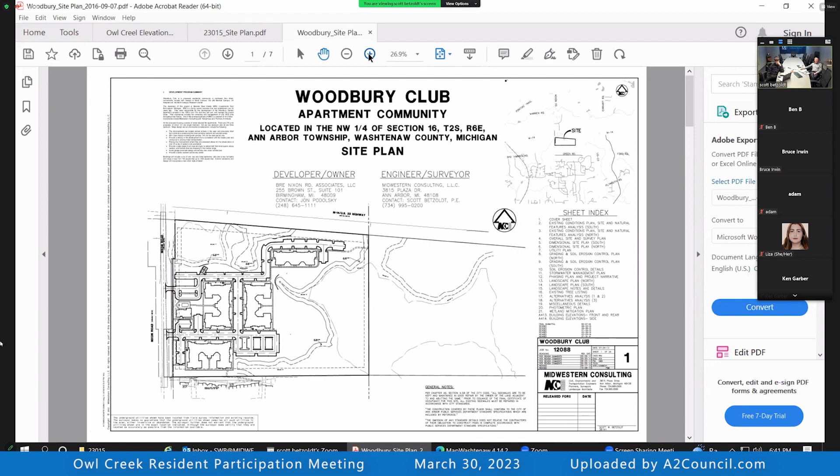And I would take an opportunity to even show you that. So this is the original submittal to the city of Ann Arbor, probably back in maybe 2014. As you see, there's a building sitting up here. I don't remember if we actually went through and completely got the whole site plan approved before we went back and amended it and removed this building, or if we decided to remove the building during the part of the approval process.

But nonetheless, it was contemplated. Many utilities have been set up in forethought of this building being constructed sometime in the future, so it's a relatively easy plug-in to the existing site.

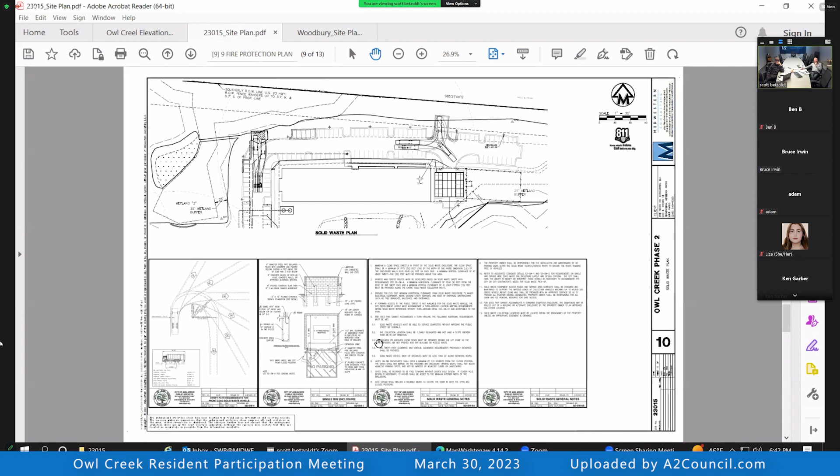The particulars of the actual footprint of the buildings changed over the course of the project. The footprint of the building we're proposing for this area, a building pad on the site as yet unused, is just a fairly simple rectangular building pad, kept as simple as possible to build. Construction costs in today's environment are sky high, so we're keeping it simple to keep both energy costs of running the building and construction costs low.

The building would have a footprint that is smaller on the first level. The upper levels would extend over that lobe of parking on the east side of the main body of the building. So that's the first floor plan—you can see the dash line extends out over that parking. This lets us increase the number of units without markedly increasing the impervious area, because at that part of the site the pavement is already impervious.

We would add a new trash dumpster location in the upper left-hand corner of the site to handle the compacted trash and recycling containers that building would produce. The existing trash handling facility is probably not going to be able to handle 100% of the trash in the new building, so we're proposing a separate trash pickup location.

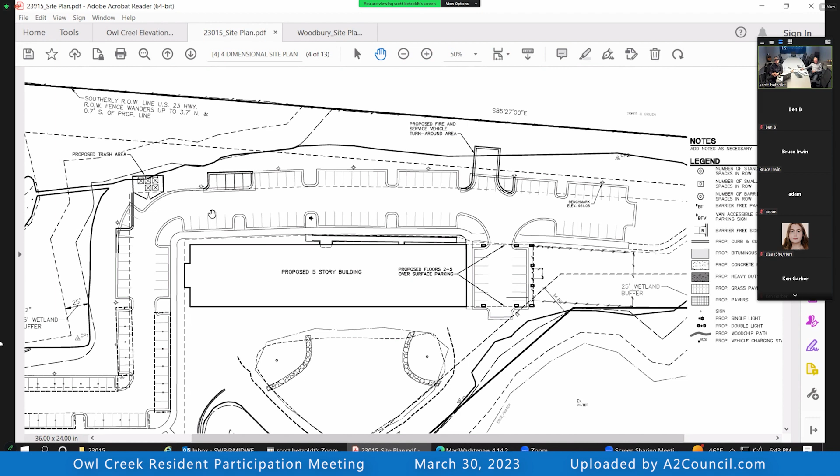The existing detention pond currently located out here will partially serve this new building. In addition, we'll be augmenting with some underground detention cells. The water and sanitary systems are perfectly capable of handling this additional building—that was vetted when we originally proposed this, what now has become a deferred project.

We've had preliminary meetings with the city to discuss refuse collection, water and sewer issues, and the parks issue. What else are we likely to tackle with them? Basically planning and zoning issues—planning, zoning, parks, solid waste, fire marshal, engineering, utilities.

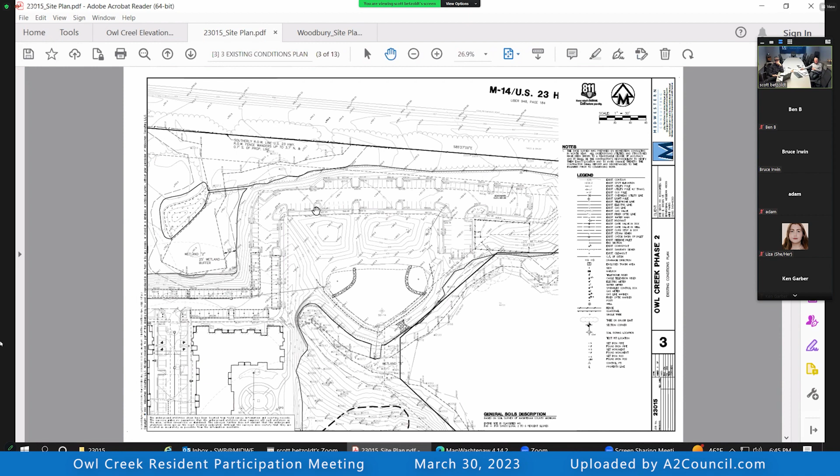Yeah, this is a rezoning since the original project was approved. Our clients donated 9 acres of property to the city of Ann Arbor—all of this over here—donated to the city at the city's request. So when this building was originally proposed, they would have met density requirements for the zoning district they were in. But because they gave away this property, they're now proposing the same building that would be at a higher density than the zoning district of the balance of the site allows.

If they hadn't given this property to the city, they would have been able to just construct this building, and it would have just been a city planning commission issue to approve—it would never have had to go to city council. But as a result of their donation of parkland, we'll now have to go to city council for technically a rezoning. But it's the same project that was originally proposed to the city of Ann Arbor back in about 2014.

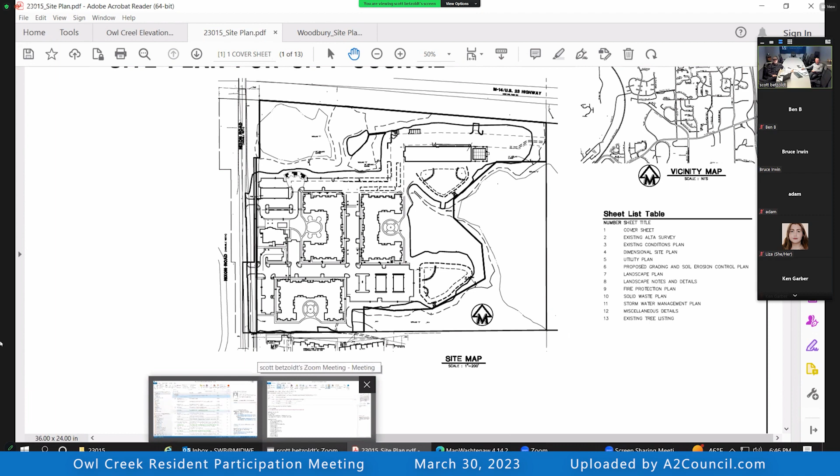You want to run through the architectural elevation? Yeah. Okay, here's the pretty stuff.

So the building would be 5 stories predominantly in the center of the structure, and then 4 stories at each end. The 4-story portions would have an outdoor amenity terrace for the residents. On the 5th floor element, the middle element, we would reserve that rooftop area for rooftop mechanical equipment and solar panels, so usage of the building's rooftop is only at each end of the building.

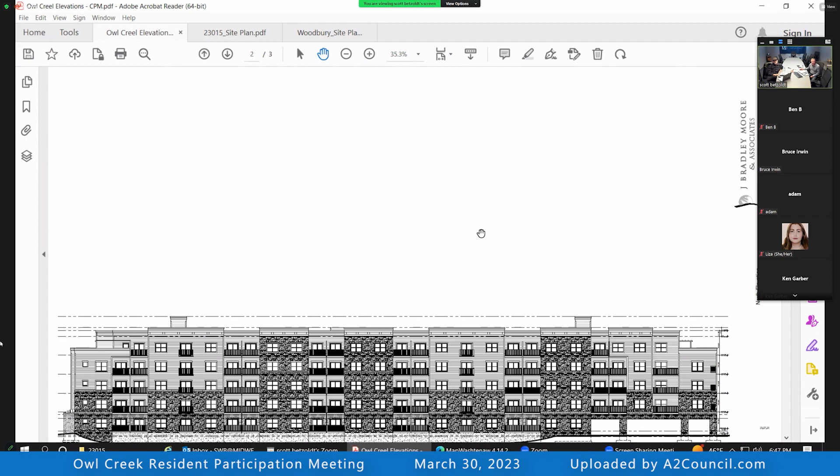You'll see on the left-hand side there's the part where the building goes over the parking. And then the exterior palette of materials is viewed as being the same as the existing buildings, which are a combination of stone and siding, and exterior balconies for most of the units, though not all, so that they have the ability to step outside in the fresh air. That's true with the existing buildings as well.

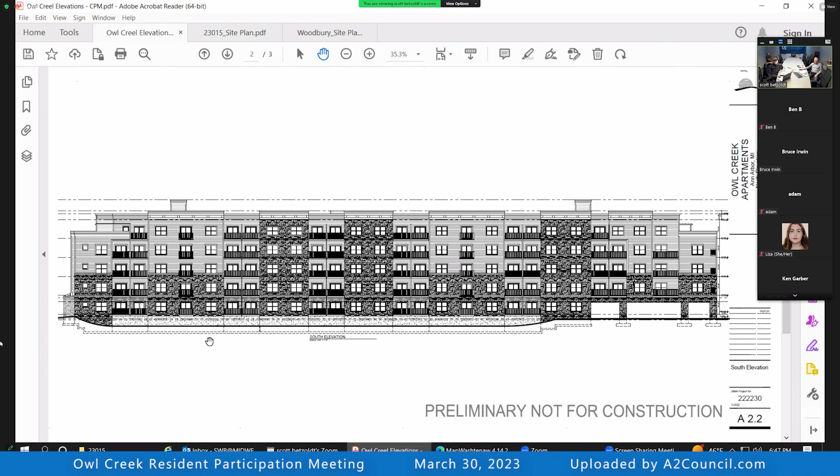This is the north elevation—this is the highway side. That's the opposite side, the south side, facing the wetland area. This isn't really a big show—these are the ends, the west end and the east end.

The first floor of the west end is a trash handling room where the trash chutes and compactors are—that's why there's an overhead door there. The 2 and 3 yard compacted trash bins get rolled out of that room over to the collection point we talked about earlier on the site.

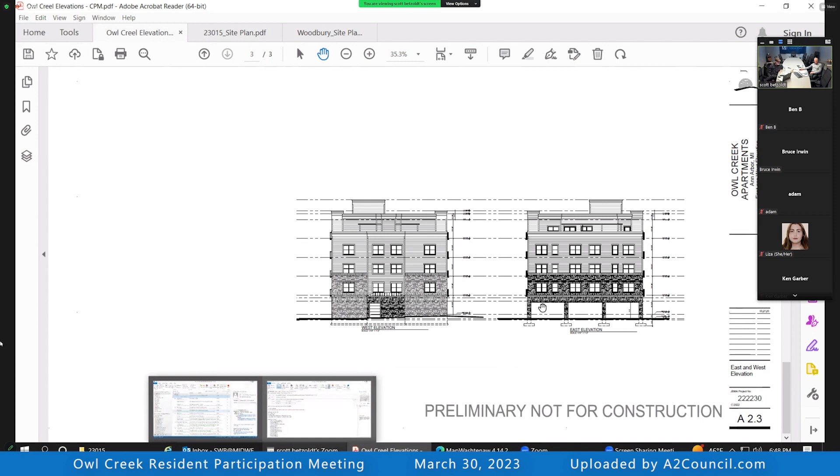So with that, we'll open it up for questions.

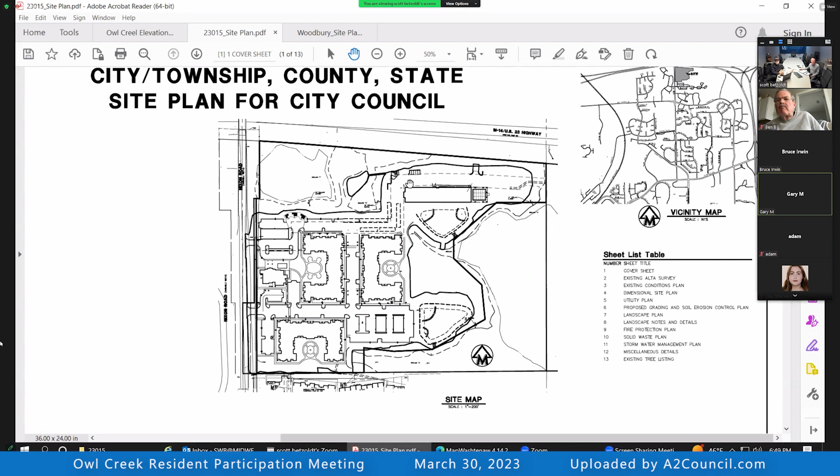So it's like the last little leg of those carports, that corner where the carport's present. So Gary, hold on a second. So right there, that corner right there, that's the one that you already see damage there. I'm not certain you're going to be able to maintain some of those carports if you're planning on getting 40-foot moving trucks in and out of there.

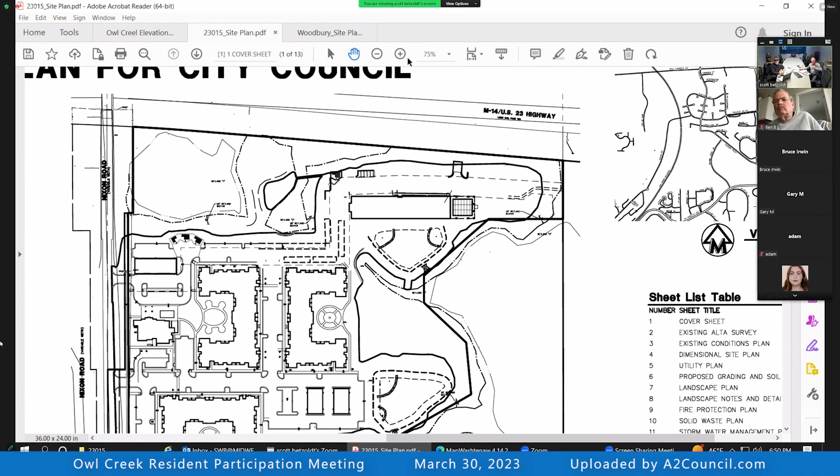Okay, well, that's very interesting. I'm glad you brought that up, let me just pull something up here. And if that's the case, we may have to relocate some of those carports. Well, we have to actually. We absolutely have to. I just need to get to...

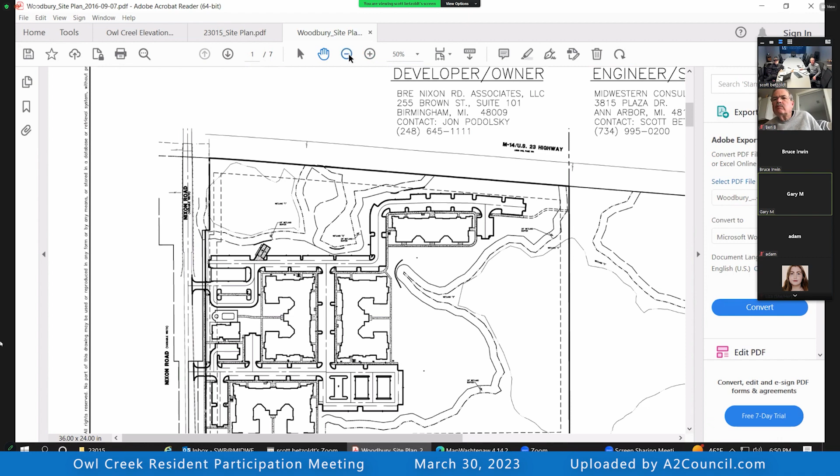And can you sort of walk us through how you envision the residents of this new structure traversing through that community, and whether they're coming out the north entrance or the south entrance onto Nixon Road? How do you envision that happening?

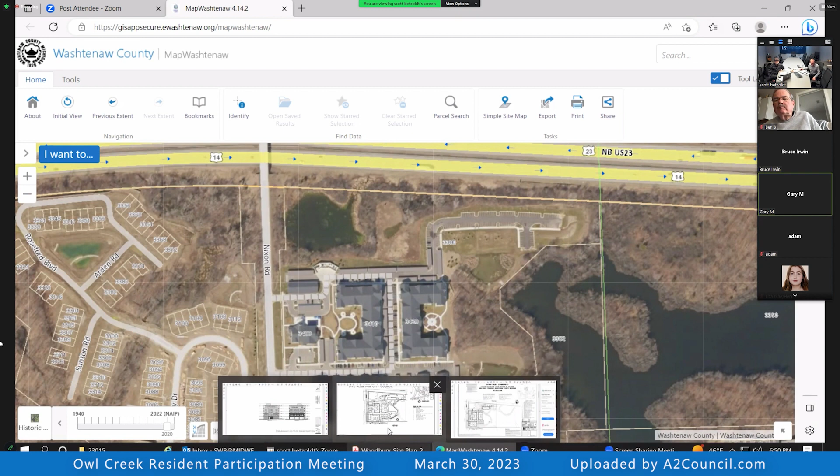I'm waiting for Scott to... Yeah, I'm obviously struggling here. Okay, all right, I got it. It's almost easier to see from the satellite view. Okay, all right, thank you. You can see the road.

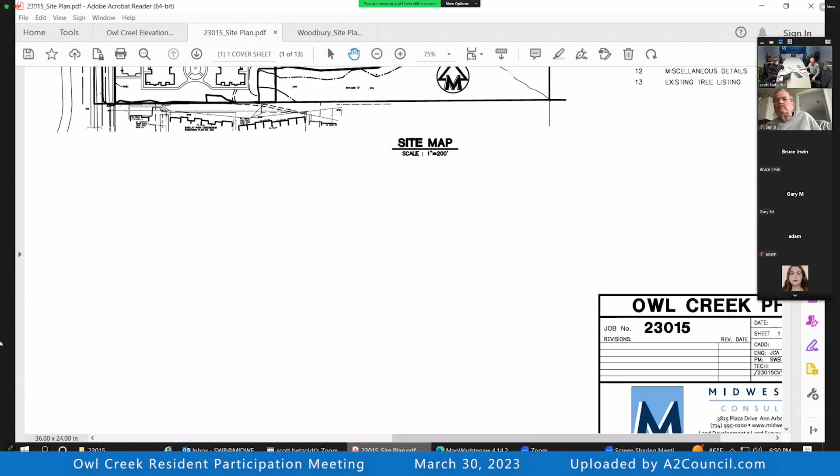Okay, so we have to remove... so I'm guessing the inside, yep, things are damaged. Okay, inside corner. Oh, thank you very much, because we have to remove either some outside carports or some inside carports. Relocate, because we have to remove them from this area since we have a water main easement that's going to be too large. They can't be in the water main easement.

So knowing this is a tight corner, am I actually looking at damage to that corner right there? Yeah, take a drive over there, you'll see that there's damage to those carport edges. Okay, that's good to know, because that tells me which ones should be relocated. And I didn't know that, but that's a very good point. I thank you for that.

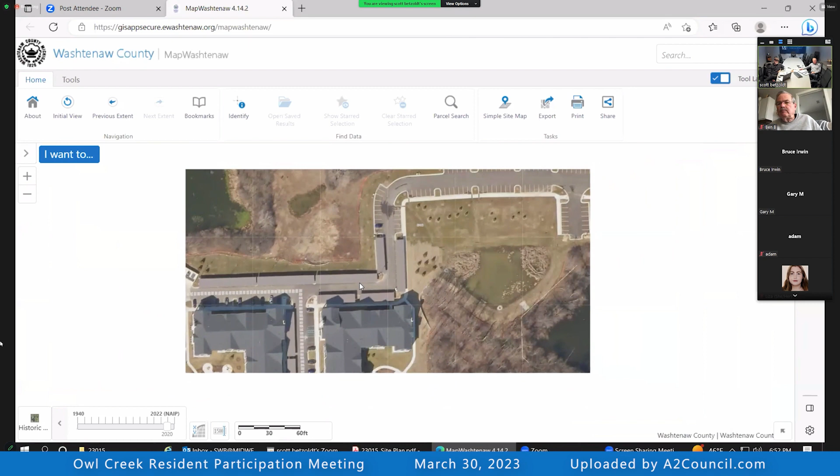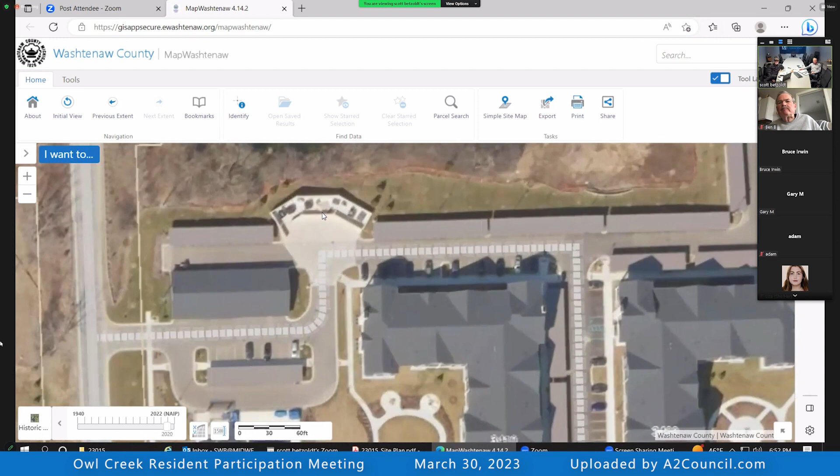Yeah, my guess is, Scott, if you can pan to the left, my guess is that the majority of the traffic would probably exit from that northern driveway, since that's the closest one to that parking lot. We have a traffic engineer retained for the project. He's not here tonight, but I could certainly verify that with him and get back to you.

No, I can see what Gary's talking about. That looks like a pinch point there. Yep, for a long, large vehicle.

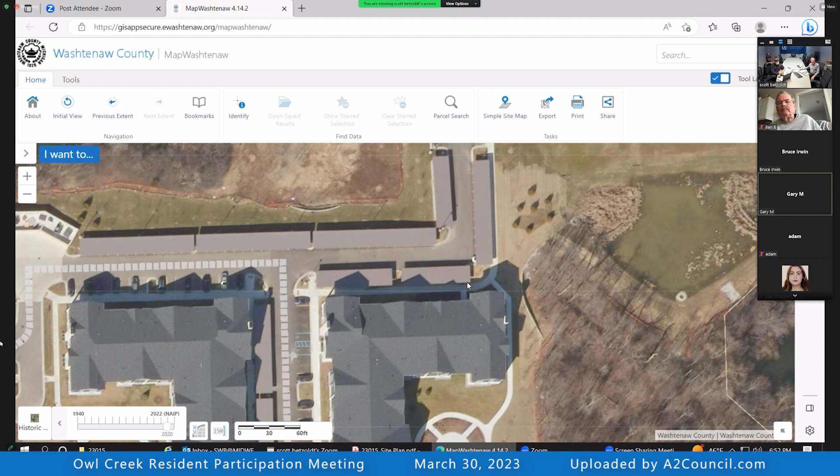So the reason I ask about the ingress and egress off on Nixon Road is that when you come out of that north entrance onto Nixon Road, the cars are coming over that hill, over the bridge, and they're cruising, and it's sort of dangerous to try and make a left turn and go south there out of the north entrance onto southbound Nixon.

Which brings me to the possibility of trying to see if you can get some traffic flow mechanism for southbound Nixon Road's speed. Northbound, yeah, probably fine, but southbound there's people probably going 60 miles an hour. I would believe you. We'll check with the city engineering and traffic department to see if there might be some kind of measure we could implement to ameliorate that.

Yeah, it might be a cause for one of those radar signs, the flashing ones. There you go, yeah, right. That's a start. People usually notice those, don't they?

Yeah, but I'm just saying right now, pulling out of the north side and trying to go south, especially in the morning, can be very dangerous. And adding more people going out of there is only going to make that situation worse. I noticed they've added some of those radar speed signs around Pioneer High School. I go past them every day, and people do seem to take notice and slow down when their speed is obviously being broadcast.

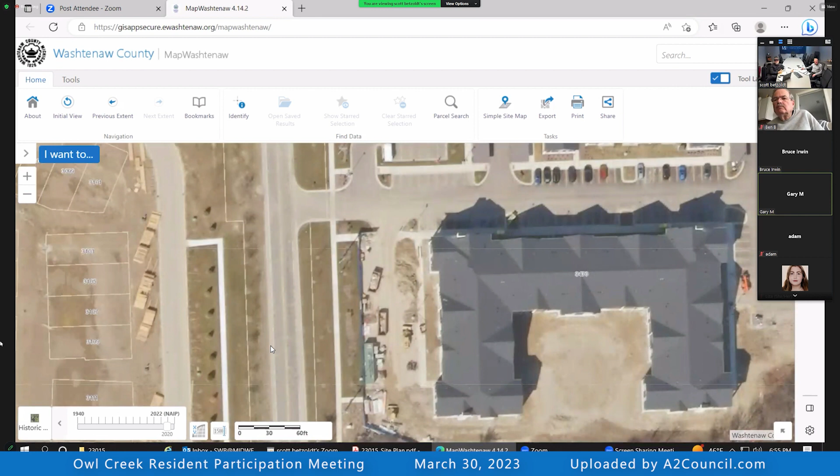So is it mostly potholes, or is the edge of the pavement deteriorating along the shoulder, or cracks forming from differential settlement? Is there any specific kind of issue? I think all of those are probably true at various points along the road.

Thanks, Gary. Having a nice new shiny residence is nice, but having your people driving over Nixon Road to get there is not going to be doing you any favors. Not that it won't be a nice place to live, because I really enjoyed my stay there.

You still live in the area, Gary? Yeah, I actually live across the street right now. Okay, the Toll Brothers development? Yep. Okay, thank you. Thanks, Gary. I'm in building 3. And right now? Right now.

I agree with what Gary has said. The road is breaking up.

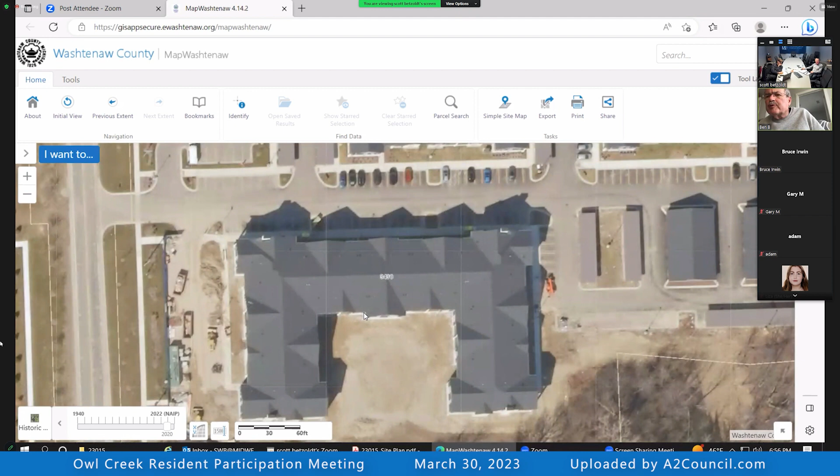How many rooms are there in the new building compared with the present buildings, which are identical? We're still studying floor plans, unit sizes, and the mix of them, but somewhere between 100 and 130 units. What are the present ones? I think altogether all 3 buildings are in the neighborhood of 260 to 265, something like that.

Okay, yeah, because the traffic has really increased exponentially out of that north driveway. That's really heavy. Mine is more of a people-centered concern.

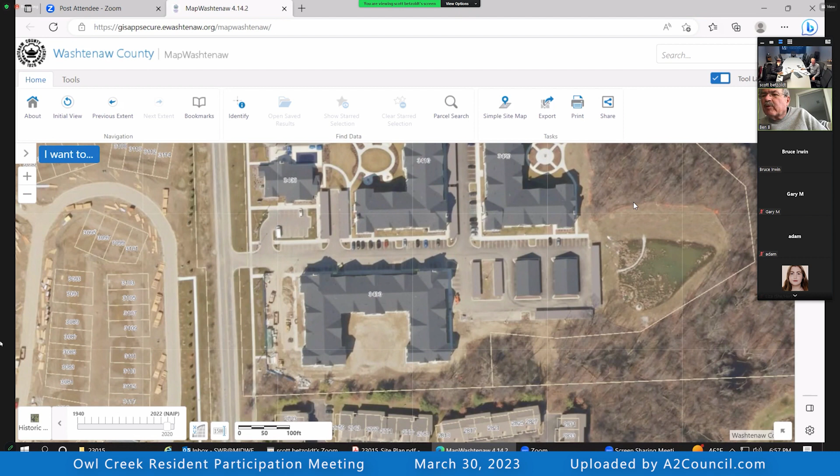Some of us already use the road to the east to go into the nature area, and it's very difficult to go into there because you've got to cross a creek, and all you're doing is crossing it with sticks laying across it. I'd hope you could have some conversations with the city to make an improvement there, because there's going to be a lot more people wanting to go in. It's just a lovely area and contributes very much to our lifestyle.

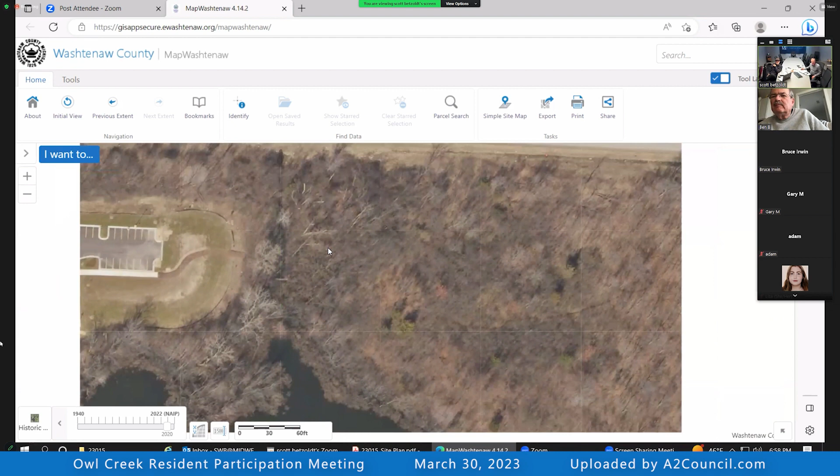We will definitely take that up with the Parks Department. The Parks Department always uses new developments as an opportunity to ask for contributions to improve city parks. So all it needs is a little bridge, not much. Yeah, we'll definitely put that on our list. That seems like an awesome idea.

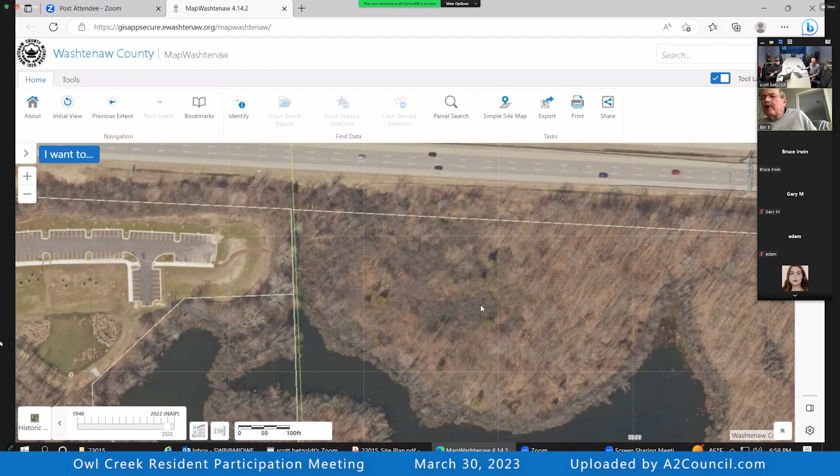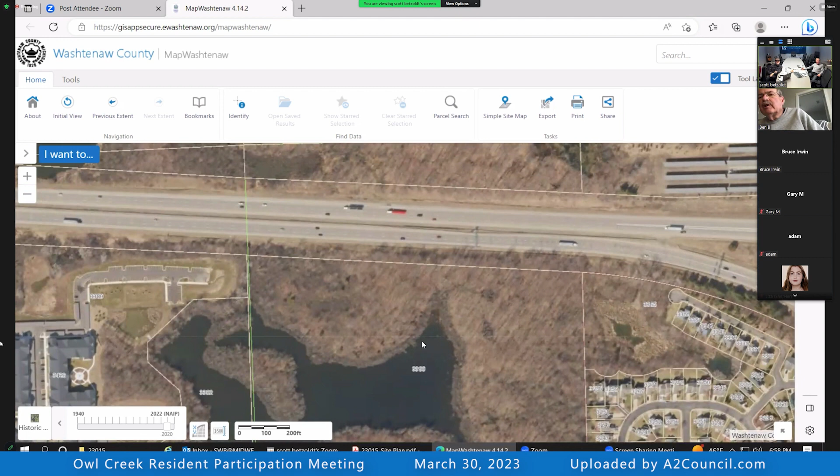Are there some paths that have sprung up through there? Oh yeah, there's trails throughout there, and they're well established. Some of those are a little wet seasonally. But it's a nice walking area, and I'm sure a lot of people take their dogs through there rather than using the dog park. I don't have a dog, so it's not me.

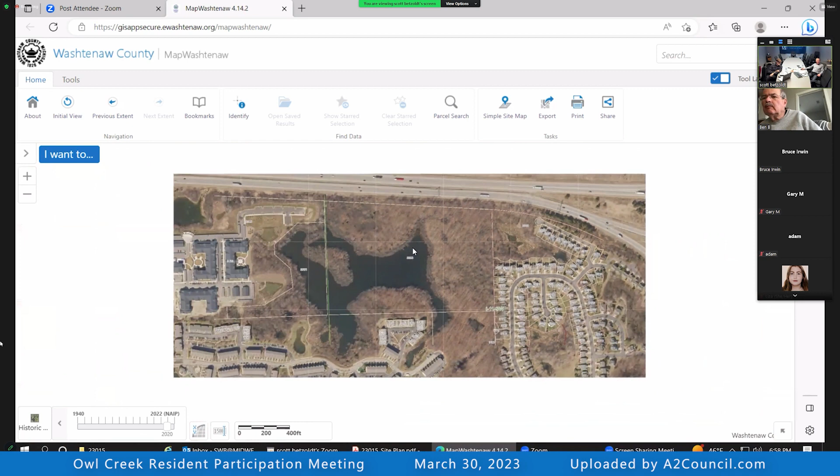Gotcha. I would imagine the bird watching is awesome there. Well, a lot more traffic will degrade it. They might need some greater protections in that nature area, but it's a nice area to go. All right, thanks, Ben.

Is there anybody else who had any comments they want to share? On that point, will the dog park be affected at all by this building? Also, commenting on the road, yeah, it's deteriorating a lot over the winter, especially right before you turn into the apartment building, the first entrance.

I've seen this happen in lots of places. Winter is terrible on our roads. I'd encourage everybody in that area to submit a request on the city's app, which you can get on your phone, to report such things. The more reports they get on a certain road, intersection, or stretch of sidewalk about the condition, the more it bumps up their priority for getting something done. We'll do our part to connect with the city's engineering and roads departments, but you can start the process with their Fix-It app by reporting it there, because in my experience, when one issue or a set of issues shows up in a stretch of road, sidewalk, or crosswalk, it gets more attention quickly.

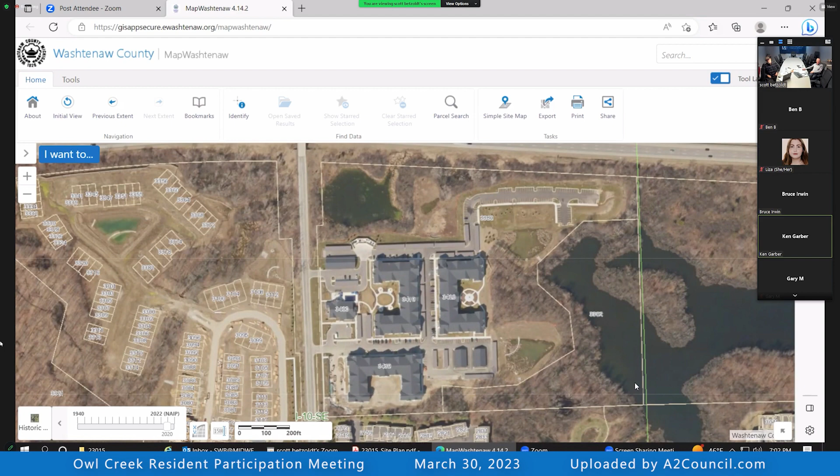I have a couple of questions. You mentioned the park donation in the southeast part of this site. Was there a previous park donation for the large portion to the east? Was that donated by the same owner? I think it was actually a sale of this property at a negotiated price, but that was not part of it. This part was the donation that occurred as part of the site planning of the entire development.

I trust Scott on that - that's before my involvement in the project. But originally our clients purchased this entire property, and the city opted to purchase this half of it because it was contiguous with the whole. I forget what they call it - Oakwoods Nature Area, I believe. Then as part of the site planning, to make the wetlands all contiguous and under singular ownership and stewardship of the city of Ann Arbor, my clients donated this 9 acres.

Right, so here's my question. That donation was built into the development agreement, correct? I assume so, yeah. So that development agreement was based on R4A zoning for the parcel. Now you're coming back saying we need R4C because we donated that parcel, and to accommodate this density we need a different zoning district. This strikes me as kind of a bait and switch - you knew at the time of the original agreement that southeast parcel wasn't going to be part of this, yet you went with R4A, and now you want to build another building, so the whole thing's got to go to R4C, as if it was unforeseen that you'd be donating this to the city.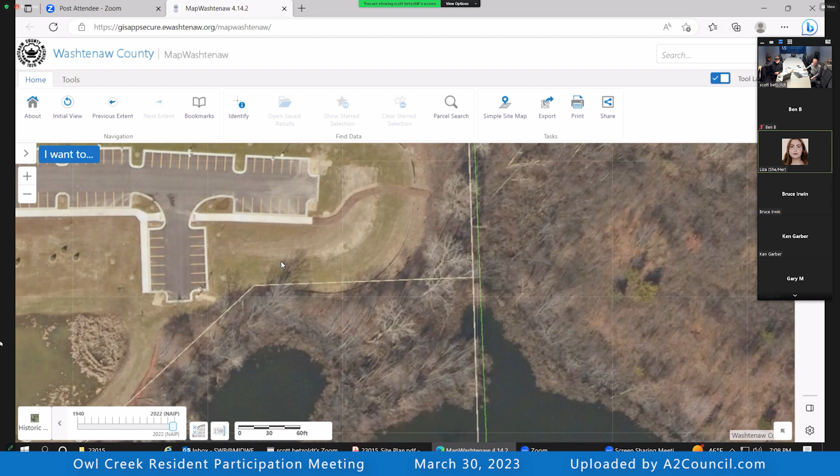So given how tight parking is in the current apartment populated areas, do you really think you're going to be able to put 135 units in there and fit their parking into the number of spaces I'm seeing here on your overhead display? It looks like it's going to be tight. Yeah, maybe fewer. We're still working with a management company to finish the analytics on the parking utilization.

Okay. My experience is every apartment gets a carport, and there's a certain number of free spaces available in that area. Some people's carports are so far away from their apartments that they park in the free spaces instead. And when you come out there at 4 o'clock in the afternoon to find a spot, you pretty much have to go to your carport because all the free spots are used in the populated areas around the apartment buildings. And I'm guessing parking's going to be really tight there.

And thus I think you're probably going to end up coming back and saying we need more parking, which I'm not certain I'm a fan of because I like the green space you've got there right now. Yeah, we'll certainly take that up with management.

Is there anybody else? Ken, go ahead. Yeah, you probably know this one's coming. Building electrification, or are you guys going to go with gas?

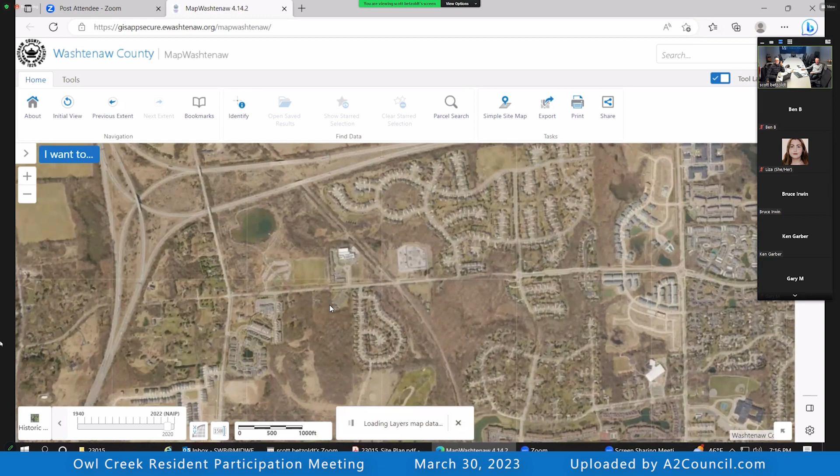Brad, is that the village development? The one on Dhu Varren and Pontiac Trail, is that the village? No, this is right on the corner, the vacant lot with the barn on it. Oh, that's commercial, right, it's a PUD. Have you submitted plans on that one yet? Nope, citizens participation meeting probably in 3 to 4 weeks. Okay, thanks.

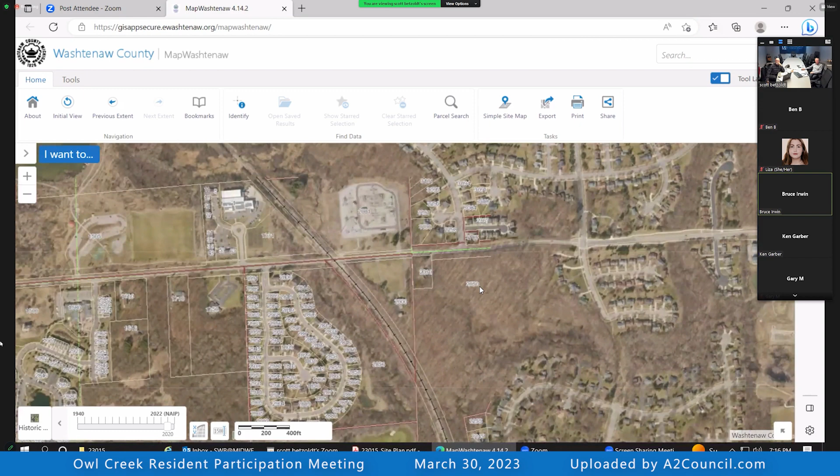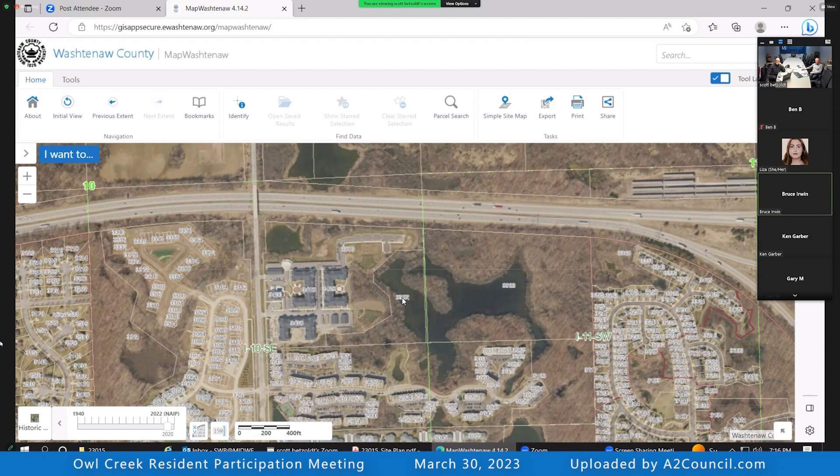Does anybody else have any questions or comments? This is probably not so much of a building question, but just a hypothetical to throw out to people who are higher up in Owl Creek. I would love to see them add composting, not just trash and recycling, for residents as an option.

Right now, even though the city of Ann Arbor gives a free bin for each residence, Owl Creek does not have any. Yeah, as a matter of fact, we're just having this discussion with the city's solid waste department.

They intend to institute compost pickup in multifamily developments, but they currently don't know the logistics of how that's going to happen. We're hoping those decisions get made about what types of collection receptacles, how frequently they'd be emptied, and who would be doing that, sometime later this summer. Given that this process takes 8-10 months, I'm sure we'll know by the end, but it's too early for us to know. But yes, we are hoping to be able to accommodate.

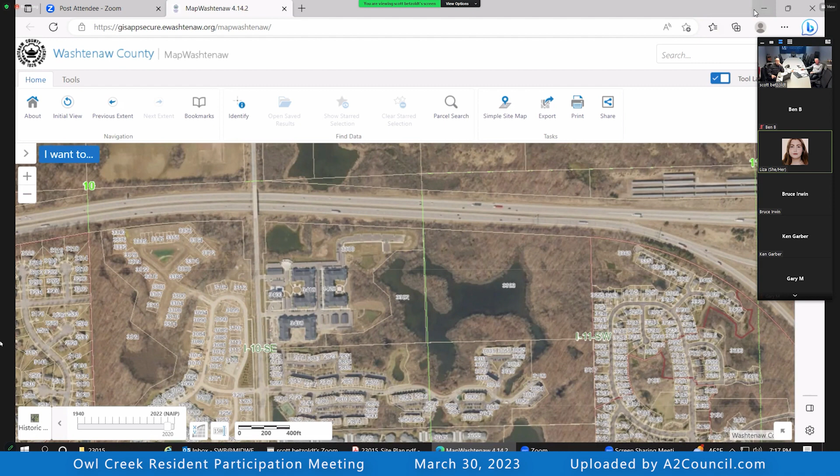That's good to know, and I get the logistic problem. Honestly, even for me, I take my composting and drive it there right now, but even if there was one outside near where the dumpsters would be, that you could at least have options and availability to, would be awesome.

Yeah, the one thing that the owners of apartment complexes don't want to do is buy containers that the city won't pick up whenever they make their decision. So I think everything's kind of in a holding pattern until the city gets its act together.